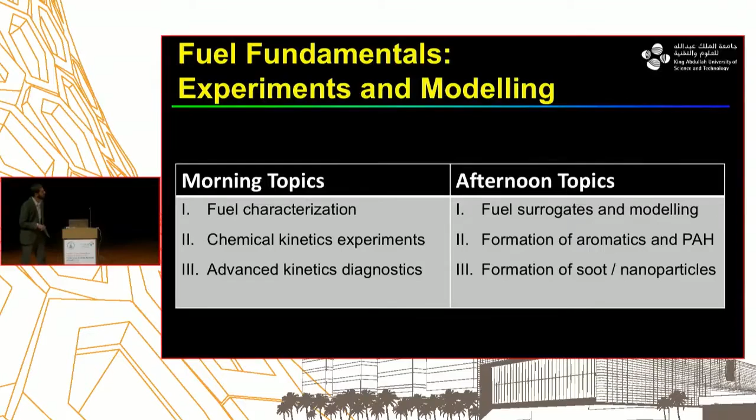So fuel is the most fundamental aspect of all the stories that we've been hearing. We have two sessions today. In the morning, I will be talking about fuel characterization, chemical kinetics experiments, and then, if time allows, a little bit on diagnostics. In the afternoon, Professor Angela Violi will talk about surrogates for fuels and a bit on kinetic modeling, but then she will focus a lot on how aromatics and nanoparticles are formed.

So with that, I'll begin first by acknowledging people. These are my group members. Some of the work that I will present today is the effort of their hard work. This is led by my research scientist, Dr. Binod Giri. Khalil manages everything in the lab. I have two really good postdocs, and really bright PhD students who have helped take our group and our research to where we are today.

In addition, I would like to acknowledge people whose slides either I borrowed, or who kindly contributed them: Manny, Henry, Alicia Renzi, and Bill Green, as well as some PhD students from the center who have been really helpful in providing information. In my group specifically, Fatih has helped quite a bit, along with Abad and Essen, in preparing some of the slides that I have.

Okay, so first, I want to begin with a couple of quick questions. Should it be a one-way instruction? What I mean by that is, although I'm standing up here and you guys are there, I want this to be more like a class. So those of you who have taken classes with me, I really encourage interaction during the classes.

So I don't want this to be a one-way instruction, and if that means I can only cover a quarter of what I've planned, that's totally fine. So please ask lots of questions, okay? And if sending this ball around takes long, just shout out. I don't promise I have answers to all your questions, because I'm presenting work from a lot of the members of the center, but those experts are here.

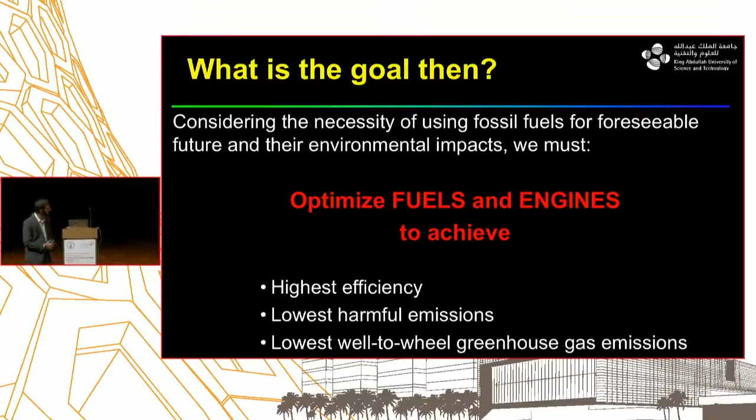In that context, and this is a point many speakers have made before, but I want to re-emphasize, if that's the scenario, then as combustion engineers and scientists we need to optimize fuels and engines to achieve highest efficiency, lowest emissions. Tony talked a lot about emissions, but I want to point out the last point, lowest well-to-wheel greenhouse gas emissions. That's the picture we need to look at, especially when we compare our technologies against other technologies like electric cars.

In fuel and engine optimization, I want to highlight 2 efforts that have been going on. We have a large program with Saudi Aramco called FuelCom, and the idea is to work on new engine concepts along with fuels to get the maximum possible impact we can have. A few years later, a program started in the US as well called Co-Optima, where they're working along the same lines as we've been doing here for some years. These are the kind of efforts needed at a very rapid scale for us to make a big impact as combustion scientists.

Okay, so fuel. As I said, fuel is the most important thing. So the first question is, what is a fuel? Anyone? Definition? Yes.

Multi-component liquid, okay? Does it have to be a liquid? Could be solid, could be gas, right? Could have many forms. But what do we really want to get out of a fuel? So energy, excellent, right? So that's the main point.

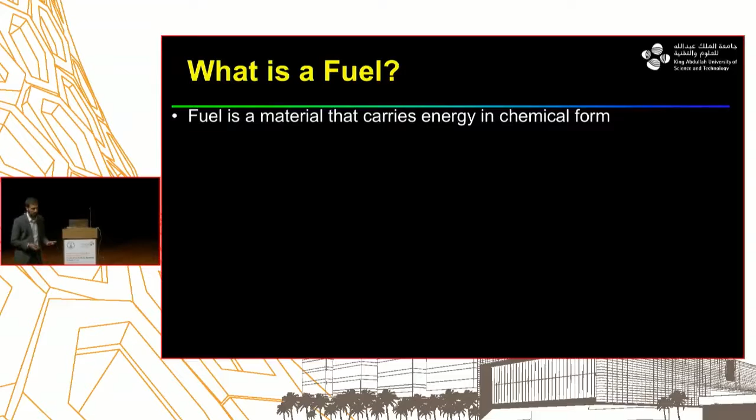So fuel is a material that carries energy in chemical form, okay? Then what do we do with that chemical energy? In most of the times when the fuel reacts, you convert that chemical energy to heat, okay? Most of the times, but not always. For example, in fuel cells or so forth, you can actually directly convert it to electric power as well, okay?

Now, so I said there that in most cases, energy is released via chemical reactions, right? So chemical reactions happen. So that then tells me that I need to really understand those chemical reactions because that's the key there, okay? And each fuel, based on its chemical structure, would undergo different kind of chemical reactions. So those details are very important.

Now, one point which is important to emphasize here is that the energy density of liquid fuels is way, way higher than anything else, okay? And that's really, really important for transportation.

So I make that point by showing you first this energy density plot for batteries and how they have evolved over the years, right? So starting from 1985 to 2020, the Model 3 Tesla car, which is like behind by 2 years in its production. But anyways, so

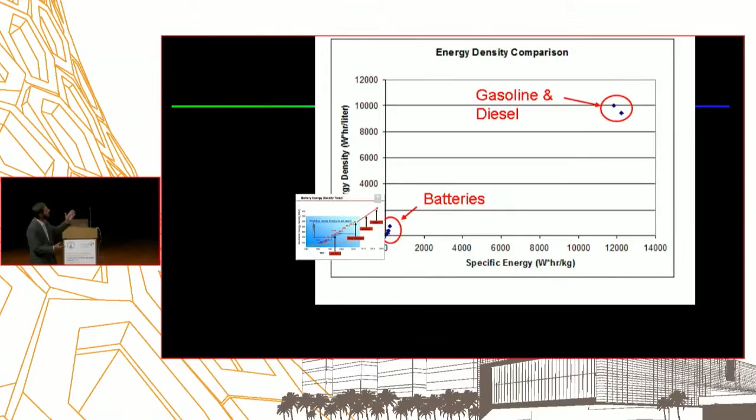their energy density has increased a lot, but when you put it in perspective compared to gasoline and diesel, it's just minuscule even right now, right? So that's the challenge that the batteries or electric cars are facing. And yes, there should be effort in those, but we cannot deny the advantages which are provided to us by gasoline and diesel fuels, okay?

Okay, so then the next question is that what properties do we really want in a fuel? So one, we want to just carry maybe the fuel and not the oxidizer, okay? That would be convenient. So we can take the second one from the atmosphere, which is air, okay? And primarily in air, there are a number of components there, but what really reacts is the oxygen, okay?

Then we want to have high exothermicity so that the fuel releases a lot of heat, okay? And that's what's going to give us eventually work, okay? And then it should be available abundantly in nature. We need millions of tons, as I put on a slide before.

And that's the challenge which is faced by what? The biofuels, right? Biofuels, a lot has been talked about, but most technologies that you have for biofuels, they just cannot match the volumes that you really need, okay? So that's why their impact so far is pretty small, okay?

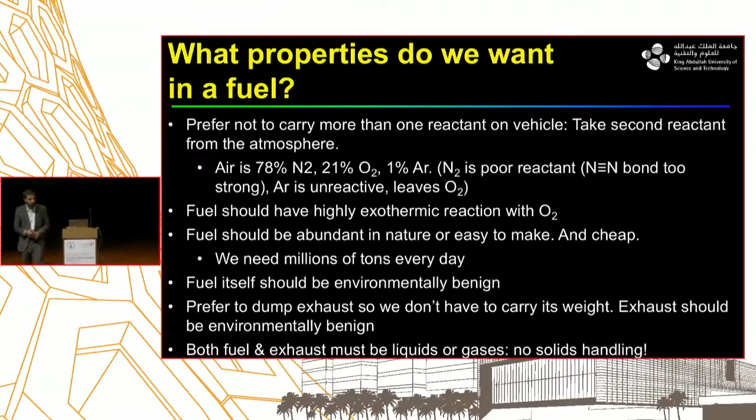Then we want the fuel to be environmentally benign, okay? We want its exhaust to also be not affect our environment, okay? And then it's better if the both fuel and the exhaust are in gas or liquid. It becomes a messy to deal with solids, okay?

So if you look at the entire space that's available to you, right, in the form of all the elements that we have, right, and you put just some basic criteria, it becomes very obvious that carbon and hydrogen have just a unique place, right? You can take any others and look at what happens to them if I use them as fuel. If I oxidize them, in some cases I'll make solid oxide, in some cases I'll make toxic elements, right? Some will not even give me enough enthalpy of oxidation, right?

So if you just set a few simple criteria, you will come to the conclusion that hydrogen and carbon in this entire landscape of the periodic table are what really, and that's why Mother Nature provided us with these, and we've been using that for useful purposes. You may be able to add some oxygen to it, as it is in biofuels, but then oxygen usually reduces the energy density. And in some cases, you can have nitrogen in there.

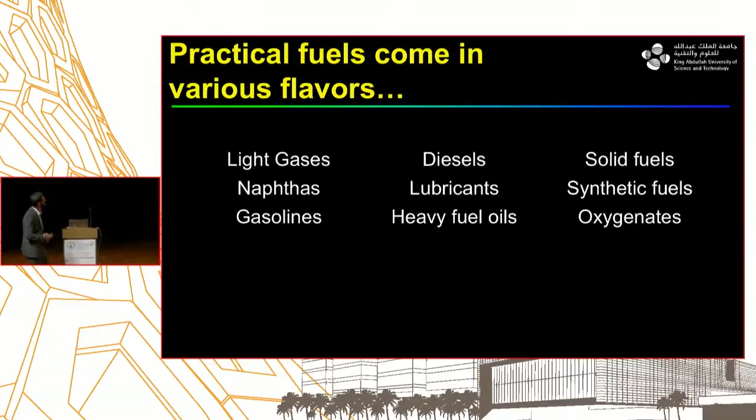So they come in a lot of different flavors, okay? Now if you want to optimize the fuel engine, which I talked about earlier, then you need to do a multi-physics sort of understanding, operation, and optimization. Among those are fluid dynamics, thermodynamics, and reaction kinetics.

So this nice slide put together by Mani talks about that if you want to optimize the efficiency, power, and emission, those could be your end goals, right? Then you need to understand the fuel, how temperature, pressure, and other parameters are affecting it. But the key here is that you have the three main pillars of fluid, thermo, and reaction kinetics.

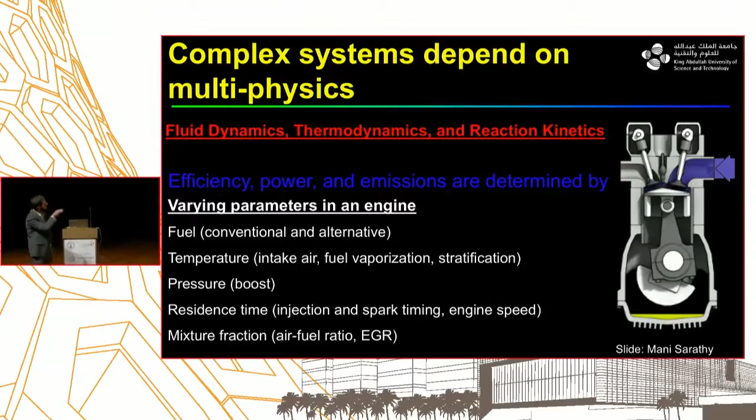And in today's talk, I will just focus on the last aspect of this entire puzzle. So how do we do the fuel optimization process in our center?

We begin with a very complex fuel, and we want to understand its molecular level characterization. Then we want to have a simpler representation. A surrogate is what? It's just a simpler representation of the fuel that we are going to use, okay?

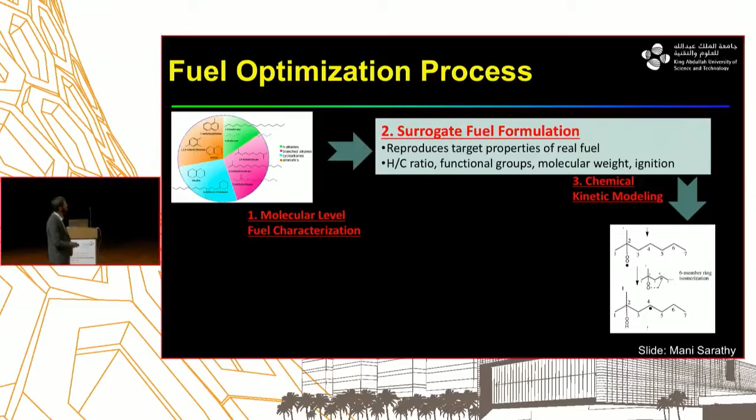Then we build some models for those surrogates. We perform experiments, and there's actually a feedback loop. It doesn't always happen like this. Sometimes you do perform experiments first and then build the models. But there's a feedback that goes on there.

And once you have that, then based on that, you can predict the performance of a device, an energy device, and see also how you can optimize it in the best possible fashion. And then you can go ahead and run engines and optimization. Again, sometimes it doesn't exactly happen in the same sequence, but these are the key steps which you would like to have.

So now in this entire puzzle or picture, what I'm going to talk about in today's class is the fuel characterization, and then the experimental part of it. I'll touch a little bit on the other aspects, but those are going to be the two key aspects. Any questions so far?

Oh, okay, so that was just introduction. Hopefully, and again, you guys asked a lot of questions yesterday to Tony Dean about that, and I think that was really, really good.

Okay, so let's begin with fuel characterization. I've listed here a few topics that I will go through in the next 15-20 minutes or so.

So in a fuel, what you care about are its chemical properties, and you also care about its physical properties. We'll see how you determine the chemical nature of the fuel and how you determine some of the physical properties of the fuel.

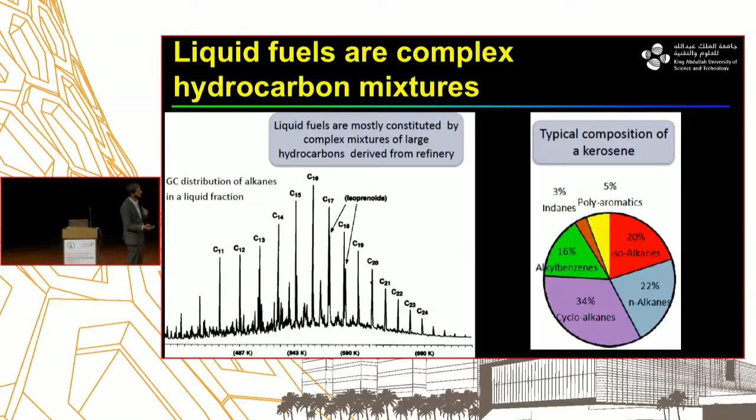This shows the different carbon number peaks that you have and how you discover them as a function of temperature. If you look at something like a kerosene fuel, it has different classes of compounds—alkyl benzenes, isoalkanes. It tends to have quite a bit of cycloalkanes.

But that fuel is going to still have some continuum or a lot of subparts in it—the fuel is complex, that's the point. So if we look, for example, at the boiling point range of different fuels: we have the boiling point on the y-axis here, and the carbon numbers on the right. At the low end, you have LPG, naphthas, then gasoline. Then as you become heavier and heavier, you go to diesel, lube oil, HFO, and so forth.

What you see, the important point here, is that there is a range, because there are many components, so it's not just one point, one carbon number, or one boiling point. Even if you look at gasolines at different times of the year or different geographical locations, they're going to have different composition and different properties.

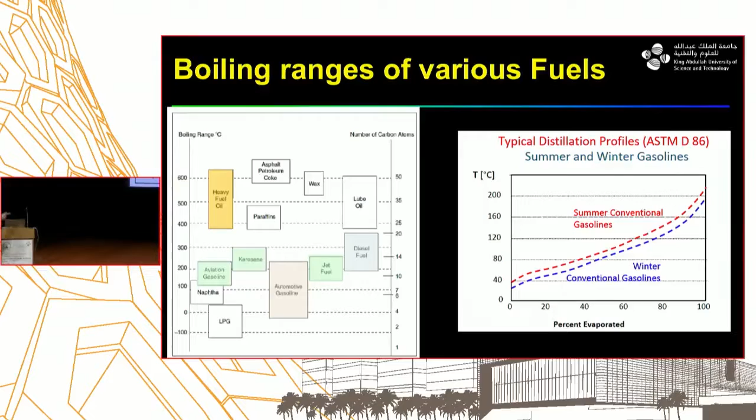The chart on the right shows how the distillation will be different between a summer or a winter gasoline. So the conclusion from this is that real fuels are complex mixtures of hundreds to thousands of components in some cases.

Before we can begin any discussion on the fuel and see what we can do with it, we need to determine what properties we want in this fuel, what will really affect engine performance or any other energy device, and how we can characterize that fuel. That's what I will focus on, and then propose a simpler representation or surrogate for that fuel.

Now, in terms of what properties are important, Bengt Johansson gave an excellent lecture talking about different kinds of engines that we have: the diesel engine, gasoline, HCCI, or advanced engines.

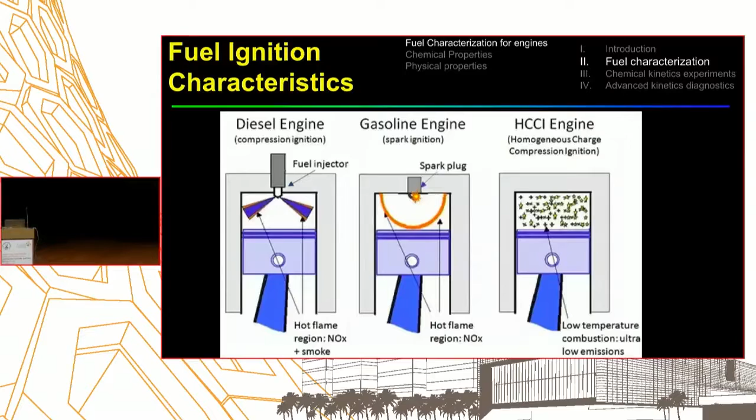What's important to understand in the context of this talk is that the fuel properties which affect energy conversion or combustion in these engines could be different as you go from one engine to another. So for example, if you talk about a diesel engine where you spray fuel into hot gases...

In that case, the chemical parameter that becomes important is the cetane number of the fuel, which is how we describe diesel fuels. Because it's an injection process of a liquid which evaporates, physical properties become very important — how does the evaporation take place? And in terms of ignition, it's mostly hot ignition or high temperature chemistry that affects the chemical processes.

If you talk about a spark ignition process, you are advancing a flame through the mixture via the spark, so the flame moves at a specific speed — a slower ignition — and then you describe the fuel by research octane number or motor octane number.

In order to describe what happens in the end gas, you need to understand knocking, and that's again a very chemical-kinetic-based phenomenon. Now maybe along with higher temperature chemistry, intermediate temperature chemistry becomes important.

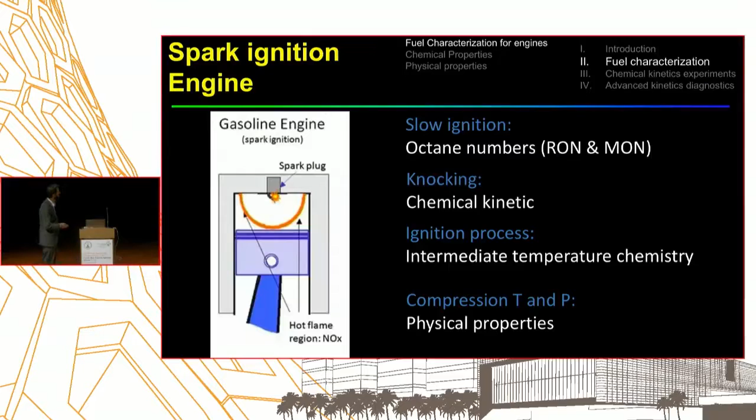Physical properties are still important in finding out the temperature and pressure as you compress this fuel-air mixture. Now, when you go to these advanced engines that Bengt described in detail, like HCCI or any low-temperature version of those, the chemical kinetics becomes even more important, because that could be your only control criteria, unless you have some control loop as Professor Johansson described.

In these cases, low-temperature chemistry also becomes important, along with intermediate and high-temperature chemistry, and physical properties still remain important. So the key point is that based on the device or the operation we have, there will be different properties we need to worry about.

So now how do we determine these properties? One of the very fundamental tools we use is called DHA, or detailed hydrocarbon analysis. This helps you really know the structure or chemical nature of this complex mixture. Primarily it's used for analyzing gasoline fuels.

It could be done for diesel, but it becomes a lot more tricky. What you eventually get from this analysis is how many paraffins, isoparaffins, olefins, and so forth are in the entire fuel. There's a specific ASTM standard used to carry out these analyses.

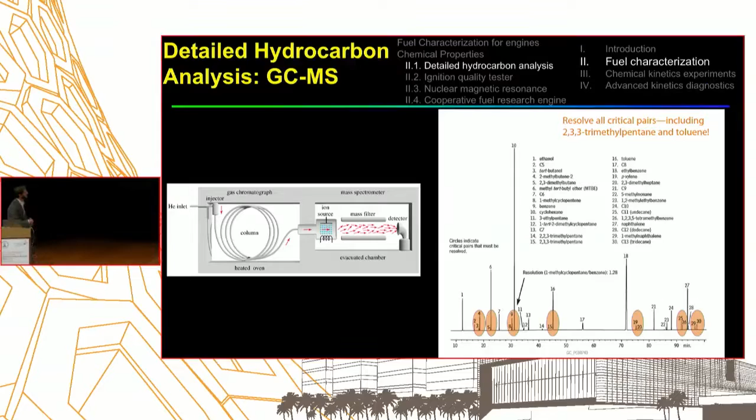For example, you need to really separate out the peaks of, as it says there, toluene and 2,3,3-trimethylpentane, which have very different chemical structures but appear close together, so you need to be able to separate that out.

So how does the typical data look like from DHA? Once you have performed it according to the method, you get a listing of your compounds, different classes, their weight percent, volume percent, and mole percent. That's all very important information we can use to understand the fuel.

You can then group that into different kinds and look at what the carbon numbers are. This analysis was done for a typical gasoline fuel, and it's centered around C7, C8, which have higher mole percentage. You can also group into a specific class and see how many carbon numbers are in each of those classes.

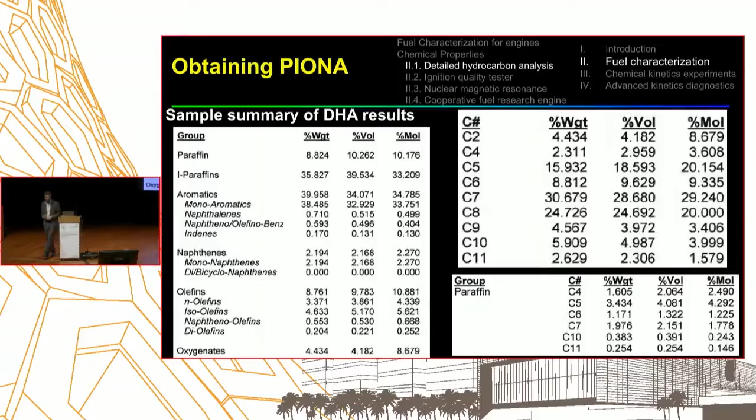So this is now the entire chemical description of the fuel from a structural perspective. Once you have that, you can use it to estimate a lot of properties of the fuel, like molecular weight, octane numbers, H/C ratio, density, physical properties and so forth. As an example, the average molecular weight for this gasoline fuel was around 90, along with some other physical properties.

But these are estimated, based on some blending rules for example. So it sometimes becomes important to go on and actually determine these properties, which I'll talk about next. This DHA will give me an octane number, but it may not be very accurate, so I may have to perform additional experiments to measure the octane number, density, or molecular weight of the fuel, because it uses some rules which may not be very accurate.

So one of the tools now, by the way, just so that you stay on track, on the right at the top you will be seeing the topics that we are covering.

So now we have moved on in chemical properties to the second topic, ignition quality tester, and we are still on the second topic of fuel characterization. The IQT, this is a picture of the IQT we have here in our center, which you would have seen during your lab visit. It's a very nice tool for quickly screening fuels. If you want to quickly know the ignition properties of a fuel, you need a very small amount of fuel and can perform this experiment very quickly. There's an ASTM standard used for that, primarily used to measure the cetane number of the fuel.

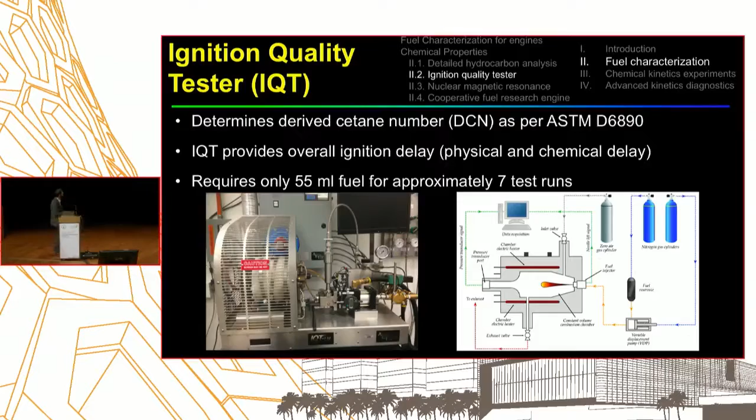On the left is a simulation performed in Professor Hong Im's group on the evaporation. Fuel was injected, it's the spray process, then it's evaporating, some along the walls, and then you see the ignition happening all along. That is shown on the right-hand side on this time versus pressure picture. From there, when you see this really large spike in pressure, that's what your ignition delay time is.

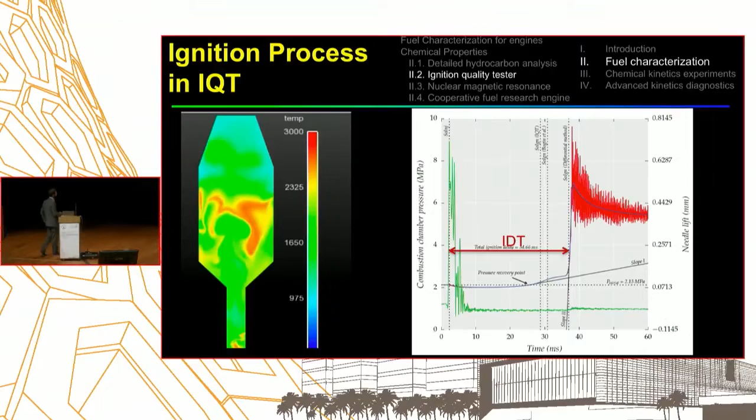But what is important to emphasize for this device, as you see in the simulation, is that there are two processes happening, sometimes in sync and sometimes overlapping. First, the physical processes are important - the fuel evaporates, and then after that it undergoes ignition. So it's a combined effect of both physical and chemical properties of the fuel.

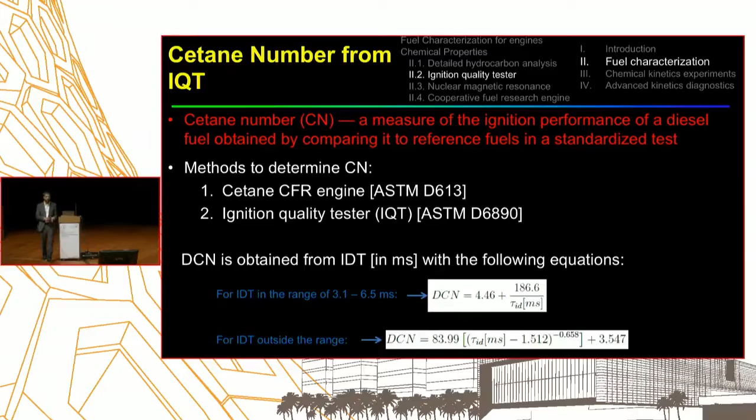What you eventually want is to get the cetane number of the fuel, which you can also get from a cetane CFR engine, for which there's a different ASTM method, but you can get it from the IQT using these relationships. Once you have measured the ignition delay time at a specific temperature and pressure condition, you can convert that to the cetane number of the fuel, and then use that to compare various fuels.

Another technique that has been used widely only recently for characterizing fuels started from some work at Princeton, and now here at KAUST in Mani's group a lot of work has been done using NMR. On the right, at the top, is the picture of the NMR facility at KAUST. We have the world's best NMR characterization tools there—I think we have like nine NMR facilities.

What NMR basically does is look at the magnetic properties of the atomic nuclei. A specific magnetic field is applied around a sample of the fuel, which you inject in there, and then you have detectors to look at how the fuel responds to the applied magnetic field, and that depends upon the chemical nature of the nuclei.

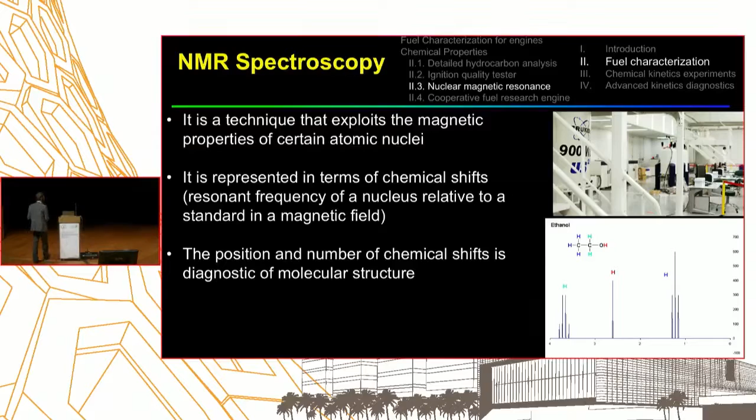What has been used a lot to characterize fuels is the 1H NMR spectra. The 1H method can basically help you know what type of hydrogen atoms are present. In contrast is the 13C method, which I'll talk about next—this basically helps us quantify. Again, you look at the chemical shifts shown there, and from there you can understand what chemical groups you have in your fuel. For each functional group, for example, how many CH3 groups, how many CH2 groups, whether they're paraffinic or coming from olefinic groups—that's how you can delve deeper into the exact structure of the fuel.

So this is a comparison of what you can get from the 1H NMR spectra versus the 13C. Again, it's based on the deuteration, or isotopic substitution method. The 13C method tends to be less sensitive than the 1H method, and it's used to look more at the carbon positions—whereas with 1H we're looking at hydrogen positions in different places in the molecule, with 13C we're looking at carbon positions, which again, based on the neighbor or structure of the carbon around it, the chemical shift will vary as you go along.

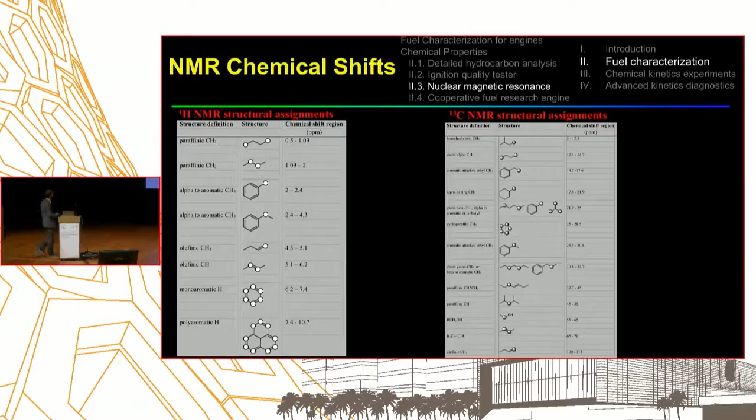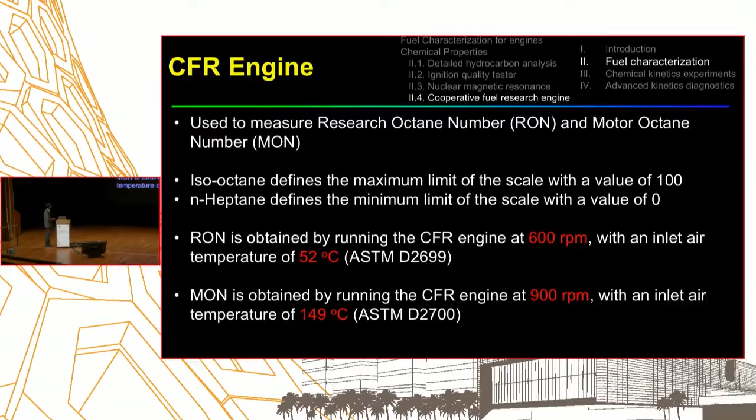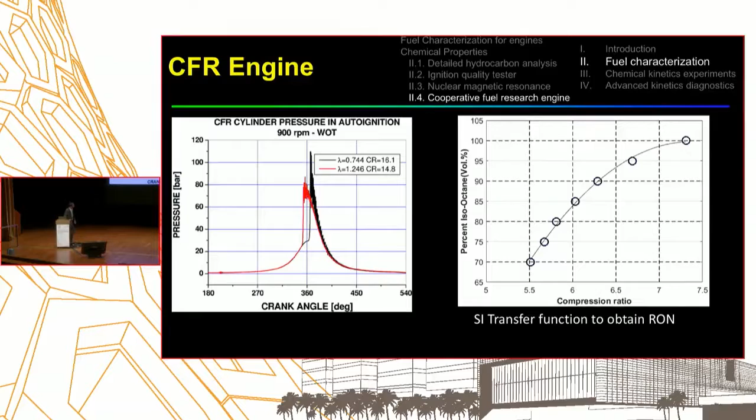Eventually what you do is compare your unknown fuel to a mixture of N-heptane and isooctane, shown on the right there. You see at what compression ratio your unknown fuel ignited, and then you compare it with a PRF mixture of N-heptane and isooctane to assign it a RON or a MON number.

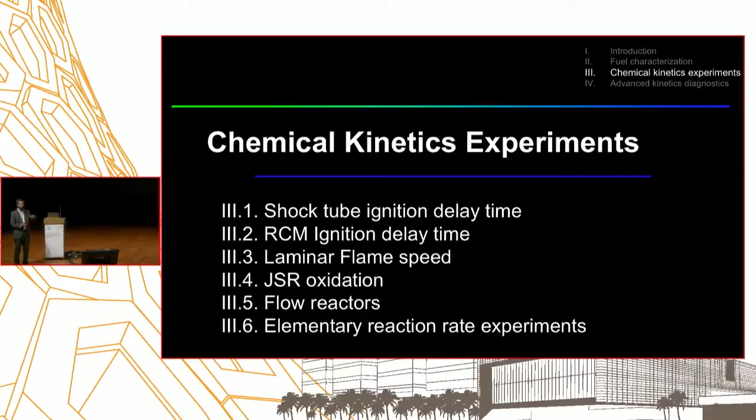Yes. I can hear you, yeah. Nice throw.

You've mentioned that you can measure the RON using the CFR and using the IQT. So what's the difference between the result from CFR and IQT? Are both accurate? So the standard is to use the CFR engine, obviously. And the process that happens in a CFR engine is very different from what happens in an IQT. The IQT just gives you an ignition delay time, and that you then convert to a DCN, a cetane number.

What has been shown in recent work is that this can be correlated with RON. Sometimes we see good agreement between the RON measured in a CFR engine and the RON derived from this entire IQT process. But sometimes you also see some deviations. So if you're asking what to trust as a standard, that's the CFR, because that's what should normally be used for measuring RON.

But the reason you may prefer using an IQT is that it's just faster. You can do it much more quickly looking at different fuels than would be possible in a CFR engine. Yeah, but there are some factors in the IQT that you don't account for, like in the CFR. So again, it's just a very different way of measuring the reactivity of the fuel, but what has been shown is that there is a correlation that exists.

This is from Stanford where I was - I like it because I think it's done really nicely. It's going to show you what happens when you light a match. A person comes in and lights a match on a match box, and you're looking at Schlieren photography there at high frame rates. So you see those nice structures of the exhaust coming from the tip of the match.

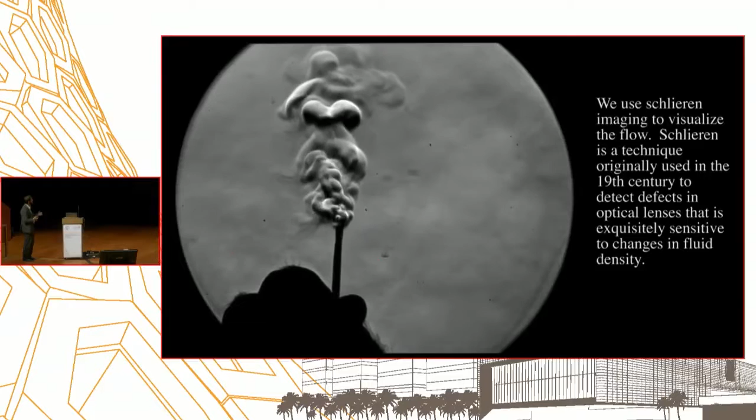Then after a while, it's playing in slow motion. I'll actually let you watch and not say too much - the text on the right is also good.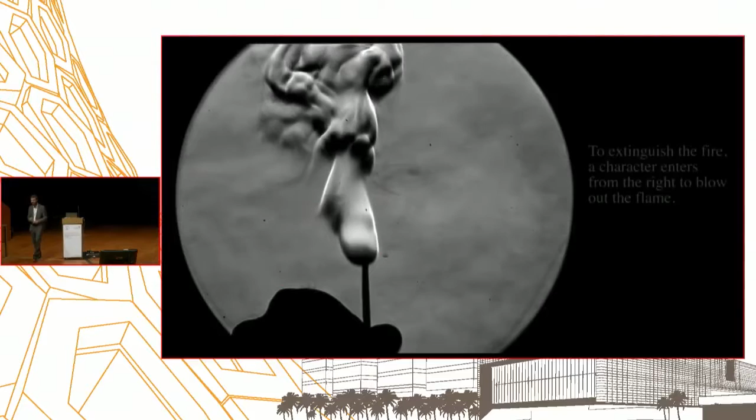Okay, so far it was not actually lit, in the sense that now the combustion products are going to come out. The music's not as good—actually I don't know if there is music, but it didn't work out.

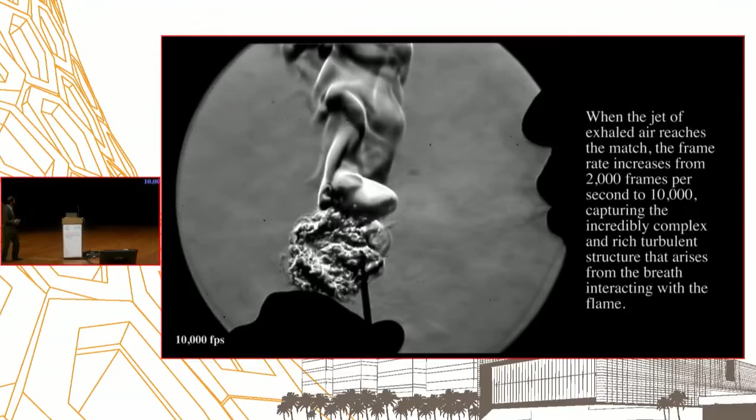So now a person comes in and tries to extinguish the match. Usually it's very easy to extinguish a match, you just blow and it happens. But in this case he's probably not blowing it as hard, so it affects that, and now you see this really amazing turbulent structure forming, the turbulent eddies from the air blown in, probably partly caused by the tip that's there.

So the next quiz question could be, as a hint, what was the Reynolds number in that blow that came in? The hint is 10,000 frames per second.

What's also interesting is that because he probably didn't blow hard enough, it actually eventually reignites. They must have done a few experiments to see this.

Okay, why do I show this video? Again, as I said, it's not exactly related, but I show this to tell you that even a simple match, which we think of as really simple—even that is...

Even that is very complicated, right? You see a lot of structures—initially laminar structure, obviously—and then once someone blows in, there's this turbulent structure, there's fuel burning, and so forth. Even a simple match is very complicated.

So it's not a good idea—well, you can do this—to shine your lasers and try to understand the match as it's burning. You can do that and you'll learn something, but what's important is to isolate the subjects, isolate the phenomena. That's the focus of my next part of the presentation: isolating chemical reactions, isolating the fuel processes, and really trying to understand those in the absence of fluid mechanics, turbulence, or heat transfer. So again I put these questions—why, what, and how—so that we should be asking questions all the time.

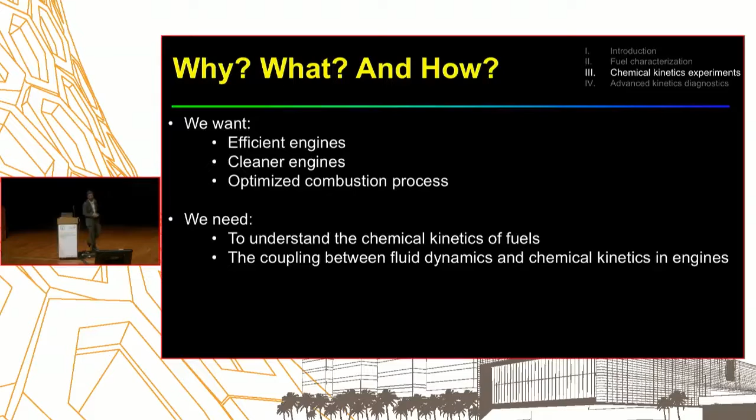We want efficient engines, we've said it many times. But we need to understand the chemical kinetics of fuels, and we want to do it in a way that we can decouple the chemical kinetics from fluid mechanics and other physics that goes on there. So we want to look at the reaction rates, the chemical kinetic models, and how fuels burn, and we want to do this in some controlled environments.

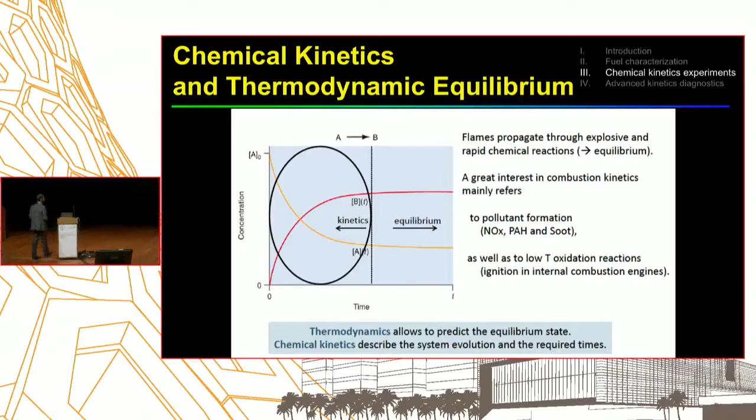Before I go on, I want to point out from this slide that what we want to focus on is the left part of this picture, the kinetics, where transients are happening—some chemical reaction starting before you reach an equilibrium condition, where thermodynamics takes over, governed by the equilibrium constant. But the kinetics on the left side is what we want to focus on, because that affects a lot of the transient processes we're studying—for example, pollutant formation, the knocking process, and so forth that we see in engines.

These reactions proceed according to how Arrhenius told us they exponentially depend upon temperature, and usually these come from some sort of fitting, sometimes from theoretical analysis as well. That's how you describe hydrogen-oxygen oxidation. Generically—something talked about a little on the first and second day—you can look at the oxidation of any fuel as comprised of some initiation, propagation, and termination reactions. The propagation reactions depend on the value of alpha in the second reaction.

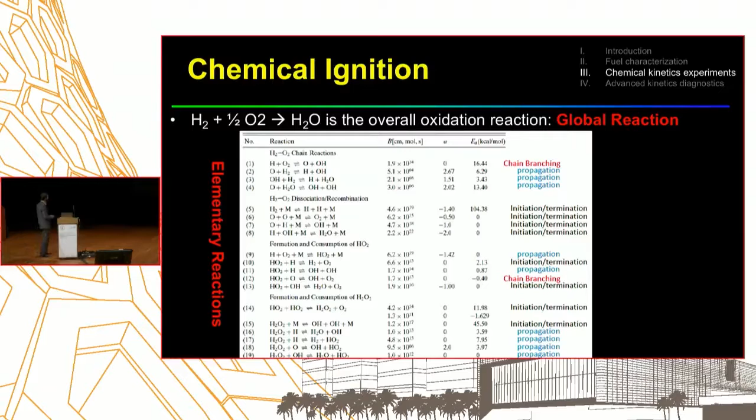And that specific reaction tends to be the key reaction in high temperature oxidation chemistry responsible for the chain branching nature of the system.

So you have these kinds, and then you can put all of that together. You can do what is called a steady state approximation, meaning at steady state the concentration of this radical remains almost constant, but what steady state means is that its consumption and production is balanced. You combine all of that to get a concentration of that radical, and then ask the question: what would make this radical increase exponentially, because the radical is what's going to explode your system.

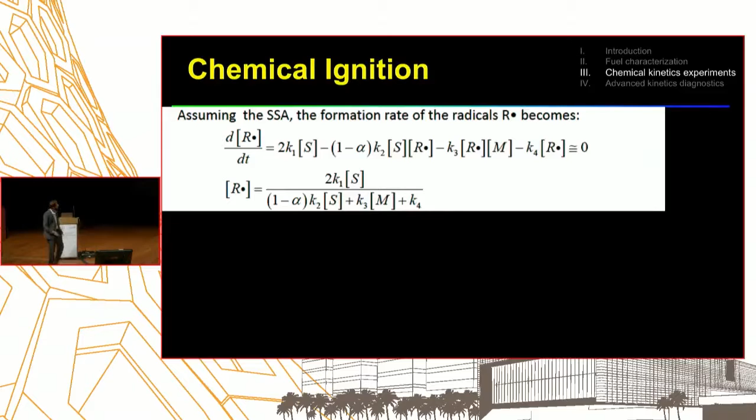I mentioned that just as a starting point, because this will help us understand when I go into a bit more detail of the chemical kinetic processes.

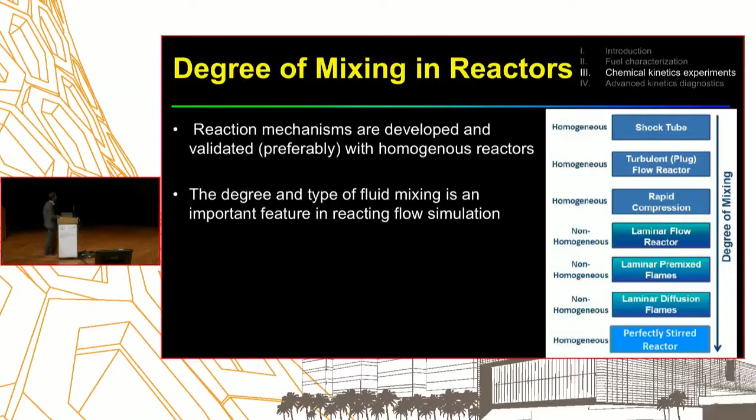So I begin with the shock tube. It's my favorite device, and I say it's an ideal reactor for kinetics. We used to say it's ideal for some time, but now I put 'ideal' in inverted commas, and I'll come back to that when it may or may not be ideal. But anyways, basically it provides us very nice 0D homogeneous conditions to study high temperature, high pressure oxidation or pyrolysis.

We have the driver section and the driven section. They are usually separated by a diaphragm of different materials, as you were seeing in that video. The low pressure section is where you put your fuel-air mixture, which you want to study in this device. So then you pressurize your driver section with an inert gas, such as helium. The diaphragm bursts at some point in time. The shock wave travels to the right, hits the end wall, and then reflects back.

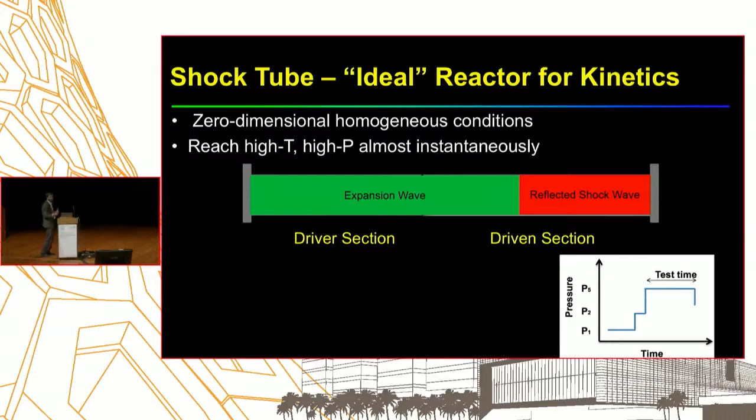In that test time is when you observe reactions or ignition of the fuel. Here we schematically show what kind of waves are generated in this shock tube. You have a shock wave traveling to the right, and some expansion waves traveling to the left. Then the shock wave hits the end wall, reflects back, and there is usually some interaction after some time, either with the contact surface, which is the separation between driver and driven gas, or an interaction with the refraction wave or expansion wave coming from the other side. And that basically ends your experiment.

Ends the experiment means what? What I've shown there is that the pressure drops suddenly, and it can sometimes increase as well, but the uniform conditions stop to exist after that. So that delta T on the right-hand side is your test time or available time, which is available to you to do experiments.

How much is that time usually? That time is usually on the order of milliseconds. Traditionally it used to be a couple of milliseconds. Now we can extend it to longer times, but it's still on the order of milliseconds.

So one important thing you need to do before you can study the fuel ignition is measure the speed of this shock wave. The shock wave is now traveling from bottom to up in that figure. You put a bunch of pressure transducers, which tell you when the shock wave arrived there, and by knowing their distance, you can measure the speed of the shock wave. It can be anywhere from 400 to 1200 meters per second in typical experiments.

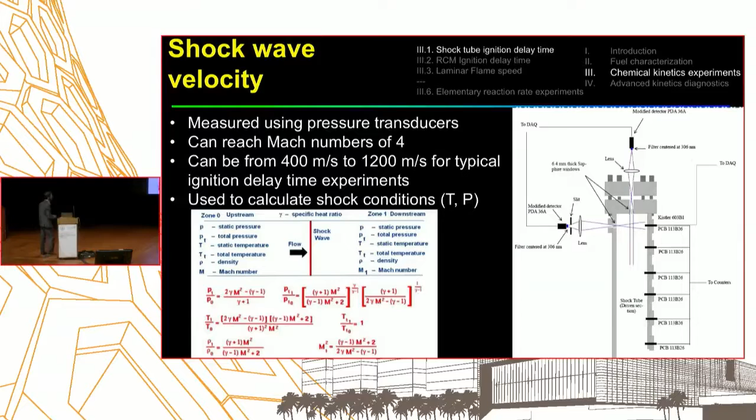So then, what is ignition delay time? Ignition delay time is one of the key quantities that we measure in the shock tube, similar to the IQT that I described earlier. But what is the difference here? Now the ignition is only affected by chemical reactions. There's no physical process going on because I put the fuel as a gaseous mixture, fuel oxidizer.

So one thing to know, and it was probably clear before as well, but I want to make the point again, is that this release of energy is not instantaneous. It looks instantaneous, but it kind of goes on exponentially after some induction time, and that induction time is what you are trying to get, and it depends upon temperature, pressure, and composition. So again, in the shock tubes, this is a homogeneous experiment in contrast to an engine or an IQT, and this really depends upon the chemistry or kinetics of the fuel.

So my student here, Fatih, he really likes this description of the ignition delay time, so he asked me to share this with you as well. There's a kind of legend about the inventor of the chessboard, right. When he invented it, the king asked him, 'Tell me what you want and I'll bestow upon you.' And the guy was smart. He said, 'Give me grains, put the grains on the chessboard, but keep doubling it. Put 1 in the first square, 2, 4, 8, and so forth.' And the king was like, 'Huh, that's all you need? You should have asked for something big.' What the emperor or king didn't realize is that if you keep doubling it, it's going to explode at some point in time.

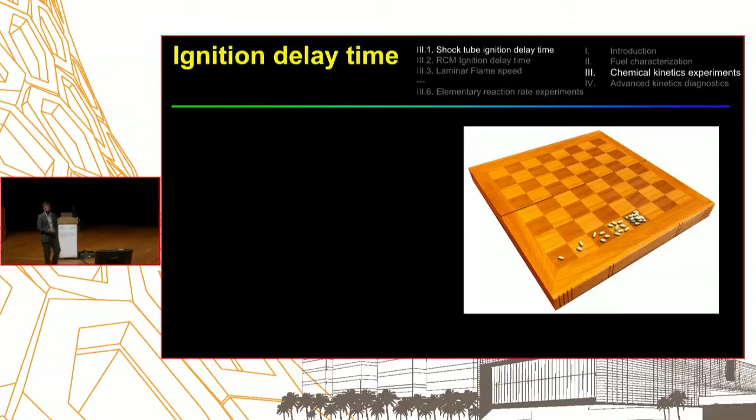So what came out was that if you would have gone like that, it would have required 18 times 10 to the power 18 grains to satisfy the wish of that guy. And that's actually even 1,500 times more than the current world production. And that was long ago.

So what do you think the king did, again, in the legend? What's that? Exactly, right? So he's like, go to hell, you tried to oversmart me, right? So he executed him.

So now, on a more practical front, this is how we measure ignition delay time in the shock tube. What I plot here is pressure as a function of time. Because my cursor is not working, I'm moving myself.

This first jump in pressure is the incident shock wave. Then the second jump in pressure is the reflected shock wave. In this case, we are reaching a pressure of 40 bar, 40 atmosphere, after the reflected shock wave.

Then the pressure almost remains constant, starts increasing towards the end, and then it explodes, at around a little before 300 microseconds, 290 microseconds, and we call that the auto-ignition delay time, or ignition delay time of the specific fuel, in this case 2-methylhexane, at the specific temperature and pressure that you see there.

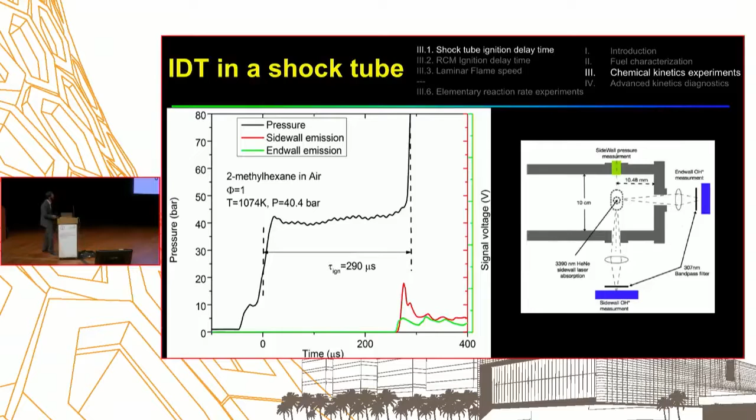But if you want to focus on low temperature chemistry, we want to go to even lower temperatures where you would expect the ignition delay times to be even longer. So how do we measure longer ignition delay times? It tends to be difficult, as I said, with the shock tube.

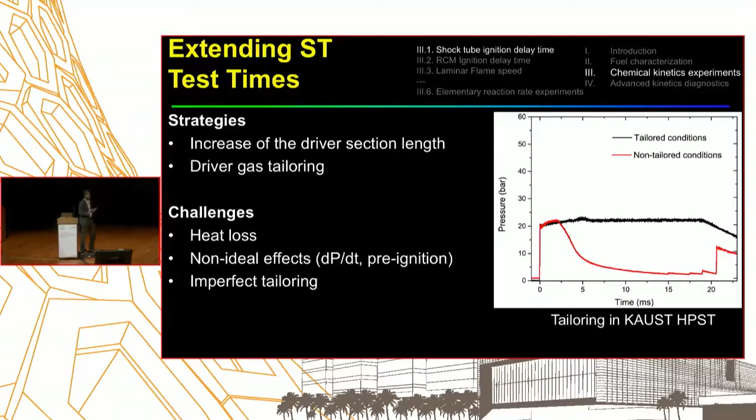But the point is that you can do this, but then some other challenges come into picture. Heat loss, some non-ideal effects start coming into the picture, and sometimes the tailoring is not perfect. What tailoring is, is that you mix helium driver gas with nitrogen or a heavier gas.

So that's a non-ideality, but we can take care of that in modeling. Experimentally, it's very difficult - there are some strategies, but it's difficult. In modeling, we can account for this change by having a volume history of this change in pressure. But you need to really quantify how much that is - is it 2% or 3% or so forth?

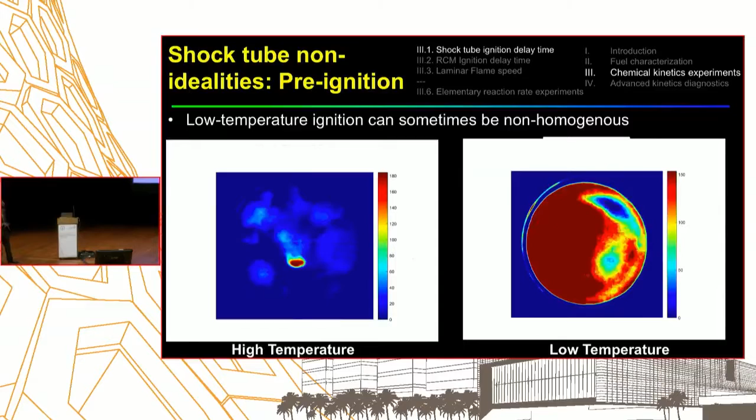What's the frame rate? The frame rate in that case was 10,000 frames per second, so 100 microseconds per frame. So it's actually not fast enough. Later on we've done some work - in this case we were using OH star, so it was limited by that. We've done some visual imaging where we can get to 60,000 or higher frame rates. That's why it's kind of difficult to see the left one - it's just so fast.

Okay, so don't worry, break is coming. We'll take the break at almost 10 o'clock, okay?

So the other device - that was about the shock tube, and I'll come back to the shock tube a little bit later as well - but the other device we can use to measure ignition delay times is called a rapid compression machine. This is a picture of the one we have here. They come in a couple of different flavors. The one we have here is a twin piston machine, so you have two pistons which come from the two ends, pneumatically compressing.

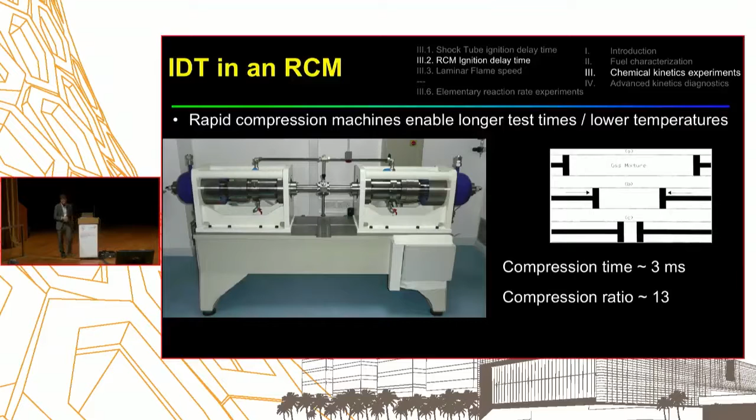And then there's a hydraulic locking mechanism which locks the pistons at their end position, as you see in part C of that picture. So as compared to an engine where you compress and then the piston comes back, here it does not - you lock it into place at the end. Now you have a constant volume operation, and so you can study fuel auto-ignition. The compression time, at least for the last 50% of compression, tends to be about a few milliseconds, especially in this device. Compression ratios can be varied, but here we mostly used a compression ratio of 13. This is just a zoom in of the combustion chamber.

If you look at it more closely, we have those two pistons coming in, and then they're stopped there. This is a zoom-in of the combustion chamber, so the middle is where the combustion happens. Then you have a pressure transducer on the left, and on the right-hand side you have the valve for gas inlet and outlet.

So how do we measure ignition delay time in a rapid compression machine? What you have here in red or black is the compression. Before time zero, the compression happens, and the pressure increases to 10 bar in this case. Then at around 120 milliseconds or so, you see the exponential rise in pressure. That's your tau, the ignition delay time.

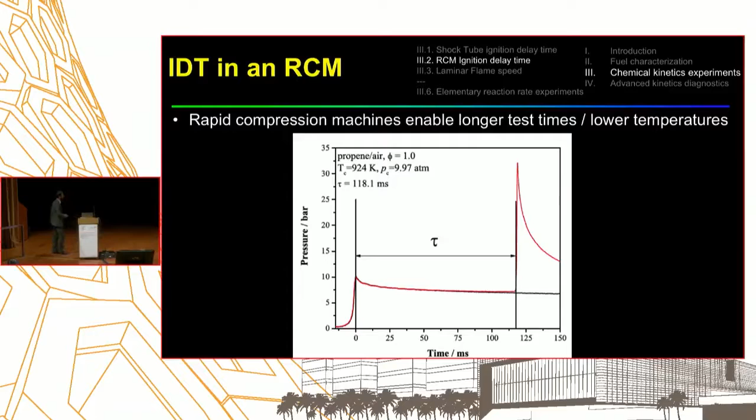But what we also see is a gradual decrease in pressure, and that's something I'll talk about in a second—it's a non-ideality of the rapid compression machine. So what is really nice is that you can combine the shock tube and rapid compression machine data.

So we combine the shock tube and RCM to study a wide range of conditions. Now what about some non-idealities in the RCM? One of them is that, compared to a shock tube, you don't have a shock wave—you have an actual piston coming in.

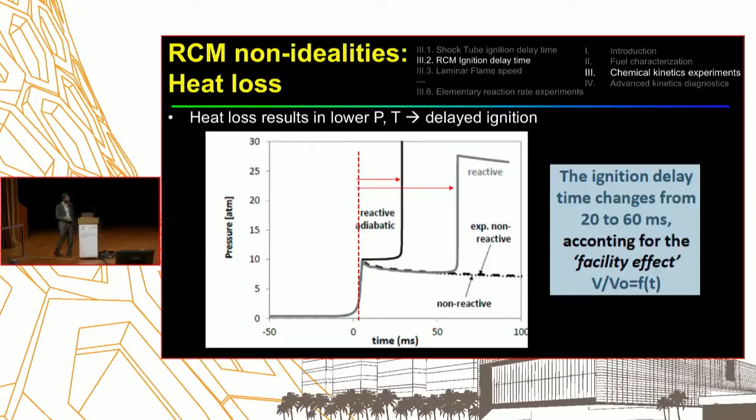So again, this is the nature of the device—you can't really overcome that. What you do is account for it by measuring the non-reactive traces, and with that you can include this in your modeling. That's what we call the adiabatic core hypothesis: you assume that your core is adiabatic, and that you've done a good enough job of absorbing the vortex and the boundary layer, and then you can apply the isentropic expression.

Okay, so you can use the isentropic expressions to calculate the temperature at the end of the compression, as shown here. Then by measuring the pressure, you can calculate the volume history, and with the volume history, you can know how much is the heat loss and include it in your model. So that's how you model an experiment in an RCM. Again, it's not as ideal an experiment as a shock tube, but it still provides us very valuable data.

Okay, I think it's probably a good time to take a break, because I'm going to talk in a bit more detail about what you get from this. So any questions before we go for a break?

How will you characterize the validity of using the chemical equilibrium assumption for hydrocarbon gaseous fuels like natural gas and propane? You showed a graph at the beginning of something. Okay, so that's basically a time scale question, right? If any chemical system, if you wait long enough, the transients will go away, the kinetics will go away, and eventually everything will be dictated by equilibrium, by the thermochemistry of the system. So it depends on whether you want to look at a system in steady state.

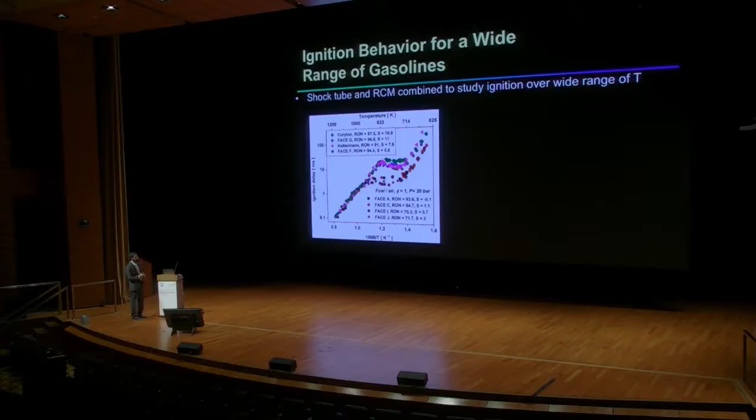These 8 different gasoline fuels have very different octane numbers. Some have 70, 80, 90, so they behave very differently in the engine. Also shown is S, the sensitivity of these fuels, which is the difference of RON and MON. These fuels have very different sensitivities too - some have about 0 sensitivity, and some as high as 11. So very different fuels, both in RON and MON, but also in chemical nature and composition, which we've checked by doing DHA. We know they're very, very different.

But what's really interesting is that at high temperatures, like higher than 1000 Kelvin or 950, they all have very similar, almost identical ignition delay times. Once you go to lower temperatures, in the region we call the NTC, negative temperature coefficient region, you start seeing separation between these different gasolines. At very low temperatures, again you see some separation. So the composition dependence or RON-MON dependence is negligible at high temperatures, predominant in the NTC region, and relatively weak at low temperatures.

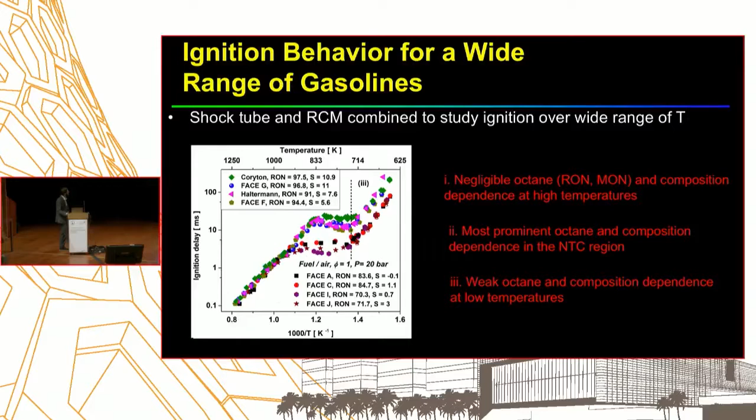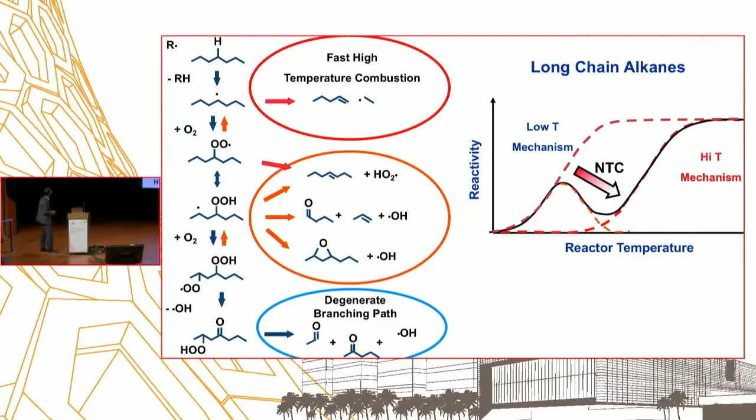So what I wanted to highlight here is that high temperature ignition is, for all practical purposes, very similar across fuels. We see differences in fuels only as we go to lower temperatures. The chemistry at high temperature and low temperature is very different. At high temperature you have pyrolysis followed by oxidation. At low temperatures you could also say it's oxidation followed by pyrolysis, but it's very different - you have O2 addition, RO2, and it's not a two-step process but a multiple-step process. It depends a lot more on the chemical nature of the fuel.

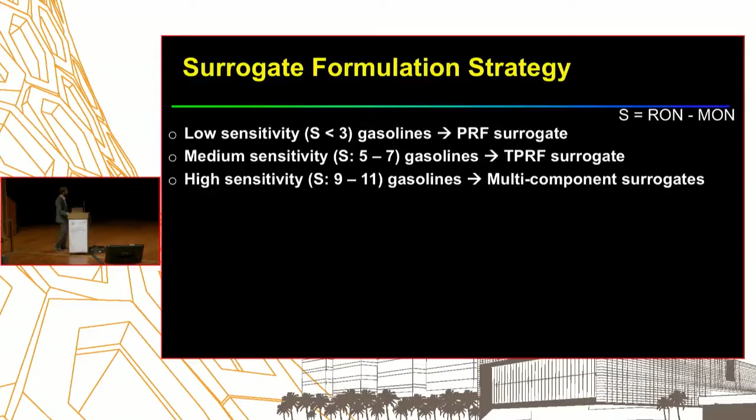I'll quickly point out, without going into details, a lot of work we've done on surrogate formulation - Angela will talk more about surrogates later in the afternoon. We figured out what kind of simpler representation to use for a variety of gasolines, categorized by the sensitivity of the fuel, where S is RON minus MON. For very low sensitivity fuels, irrespective of their RON and MON numbers, you can use a PRF, a two-component surrogate, to describe ignition. For medium sensitivity, you need to add toluene to compensate. For very high sensitivity fuels, you need multi-component surrogates. We have a nice tool in our center where you can input target properties and it helps you come up with a multi-component surrogate representing the real fuel. You can try this tool and others at the CloudFlame portal.

Okay, so that was all about ignition delays in the shock tube and RCM. Any questions on that?

I want to emphasize that the high temperature ignition of all practical fuels being very similar is an important take-home message from that part.

Okay, another kind of experiment that you can use to characterize the chemical nature of the fuel is laminar flame speeds. Professor Maruta talked about this in detail in his lecture on the first day, so I will not go into detail, but the point here is that this gives us an additional measurement that you can use to validate your mechanisms.

It depends not only on the high temperature chemistry, but also on the transport properties of the fuel. So you have different methods for measuring flame speeds: burner method, flat flame, and the method we use in our center, the outwardly propagating flame.

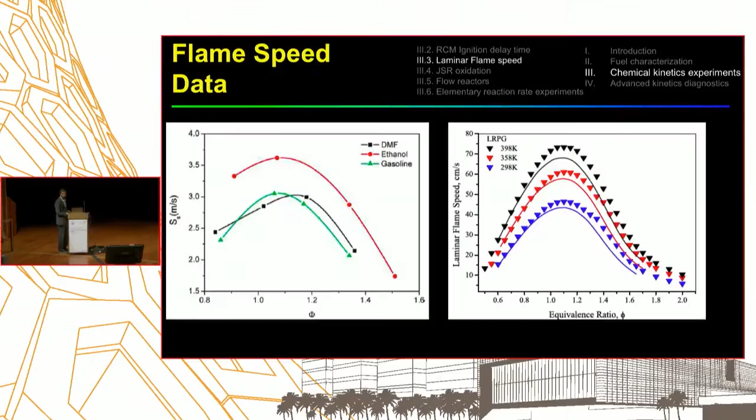Any other questions on flame speed? No? Okay, other than that one.

The other device that we use for testing our models, and we have a very nice setup for here, is a JSR. What you do is have your reactants coming in from the top, and you create some sort of jet structure in the middle to create enough mixing, so that you can have a well-mixed fuel-air mixture. I was just talking to a student in the break about how a lot of work has gone into designing these jet reactors, using measurements to make sure you get enough mixing before looking at the chemistry under those mixed conditions.

Usually you use a GCMS kind of coupling to it, although it can be coupled to more advanced diagnostic methods as well to look at speciation. So primarily you look at the different species coming out of the exit of the jet reactor. There are many different designs that people have looked into.

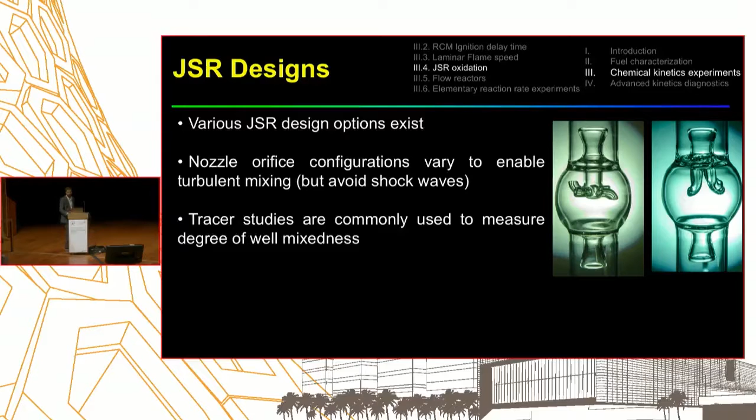The configuration of the nozzles, the number of nozzles, the angle of the nozzles, and so forth. You can do validation studies, some tracer-based studies, to look at which design is better than the other. Some work was done here and at other places to verify this. The most famous design is the Philippe Dagaut design that is used in many different places.

Okay, now flow reactors, moving on to the other devices. The flow reactors, they come in different flavors. So this is an example of the Princeton turbulent variable pressure flow reactor.

For a turbulent reactor, what you make sure is that you have enough mixing in the early part of the reactor through turbulent processes, so that then you can go ahead and model this as a plug flow reactor. The total residence time in that case can be broken down into your initial mixing time, or the perfectly stirred reactor time, plus the PFR time. If the initial mixing time is small enough, then it becomes relatively easy to model what happens in this turbulent flow reactor.

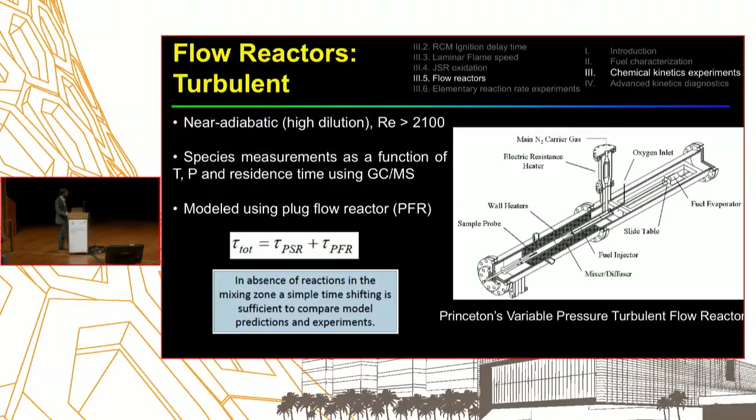Now, I'm not showing you some examples of data from here, but basically the data that you get out of these flow reactors is also speciation. So you couple it to GCMS kind of devices, and then you can look at, as a function of temperature and pressure, because this can go to really high pressures, what happens to chemistry at high pressures.

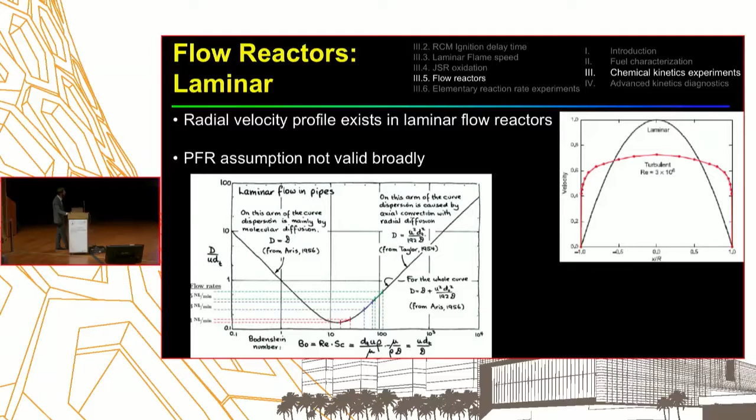What he shows is that based on this pipe flow kind of diagram, just in the valley of that picture is where you can model this as a PFR, as a perfect PFR in your modeling. So once you make sure that you are in that condition, then you can go ahead and perform very nice experiments in laminar flow reactors as well.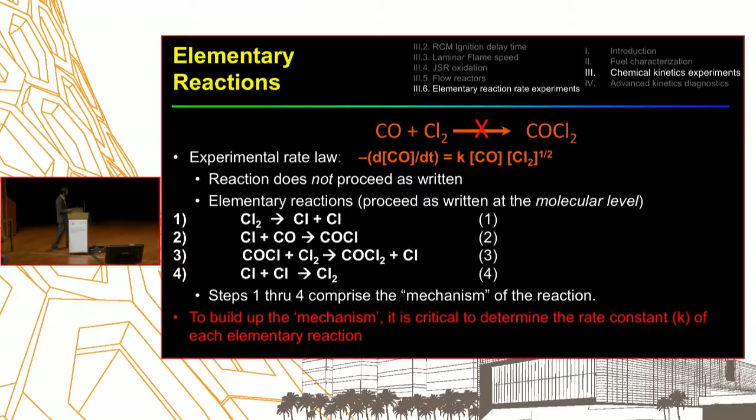It actually proceeds through a bunch of elementary reactions. In this case, these four reactions describe the chemical mechanism happening: Cl2 dissociates, giving two chlorine atoms; that reacts and combines with CO to give COCl; that reacts with Cl2 to give COCl2 and then a chlorine atom, which can combine to make Cl2—that last one would be a termination reaction, two Cl radicals coming together and making Cl2. So to describe this formation of phosgene, we need to know these four reactions really well, including the rate constant of each individual reaction, so we can describe the mechanism.

These individual elementary reactions come in different flavors: you can have a unimolecular reaction, just some A going to products; bimolecular reactions, A plus B coming together giving one or many products; and sometimes termolecular reactions. Why didn't I keep going—why not 4-molecular, 5-molecular reactions? The statistical probability of that happening is very low. Even termolecular reactions are not as common a reaction class as bimolecular reactions.

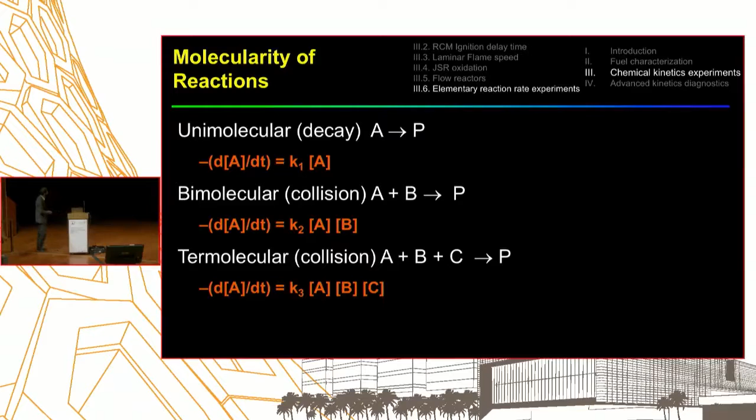So what I've written there is the law of mass action for these, and again what we want to know is the rate constants K1, K2, and K3 for these kinds of reactions. One device we use in our lab to measure elementary reaction rates is again the shock tube. The shock tube can be used to measure the auto-ignition delay time I described earlier, but it can also be used to measure these elementary reaction rates.

In this case, you make use of a laser-based diagnostic. What we are doing here is we want to detect OH radicals. So we start with a pump laser at 532 nanometers, pass it through a ring dye laser, which gives us a visible laser at 613 nanometers, then we frequency double it to get UV light at 306 nanometers.

Then we pass it through the shock tube. We measure the intensity before the shock tube, I naught, and then after the shock tube. We combine those two intensity measurements using the Beer-Lambert law to calculate the mole fraction of OH radicals. That 306.7 nanometers is in resonance with an OH absorption feature.

So in this case, the objective was to measure the reaction of fuel plus OH. Fuel could be anything—methane, toluene, N-heptane, or a more complex mixture—but we would rather use a single component fuel. Then we want to know the rate constant of that fuel plus OH reaction.

But how do you get OH in the shock tube? We don't want any other things in there, so we use a thermal precursor called tert-butyl hydroperoxide. The bond between O and OH is very weak, with low bond dissociation energy, so it breaks off quickly as the shock wave heats the mixture. That gives you an OH radical, which can then react with the fuel. You also get some extra stuff, butoxy, which you don't want, but you can take care of that.

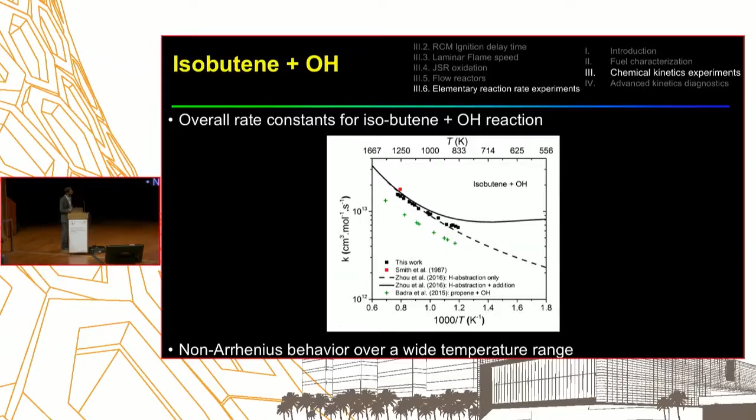But what you see is that black solid line, and some of our data also show that at lower temperatures, you start deviating from the Arrhenius nature—rather than a purely Arrhenius behavior, you start seeing non-Arrhenius behavior. What happens is that at lower temperature, rather than abstracting an H atom from isobutene, OH starts to add to the double bond. That addition process has very different physics and chemistry than the abstraction process, which is primarily what we studied here.

Okay, so how does this reaction actually take place? Now we are going to look at the details of the elementary reaction. We have an OH radical at the top coming in and attacking this isobutene. Just for simplicity, I also show the isobutene structure down there.

So now that OH can abstract an H atom, basically knock off an H atom from one of two sites, either from the CH2 site or from the CH3 site. That CH3 site is called an allylic site, and this one is called a vinylic site. So that's what you see in those two channels: channel 1A, where it was removed from the CH2 group, or channel 1B, where the H was abstracted from the CH3 group.

Now these two are sort of two sub-channels of the overall reaction. Why would I want to know the rate constant of these two sub-channels, K1A and K1B? It's actually very important, because what happens next to that radical at the top or at the bottom is very different. The allylic radical that we have formed is very stable, so it persists for long periods in your combustion system, whereas the vinylic radical is much more reactive. So this distribution between these two radicals is very important to predict the overall oxidation of this entire system. But then how can I get it?

How can I measure K1A and K1B? Because the only measurement that I showed you was just the OH, and OH is used in both channels. So how can we do that?

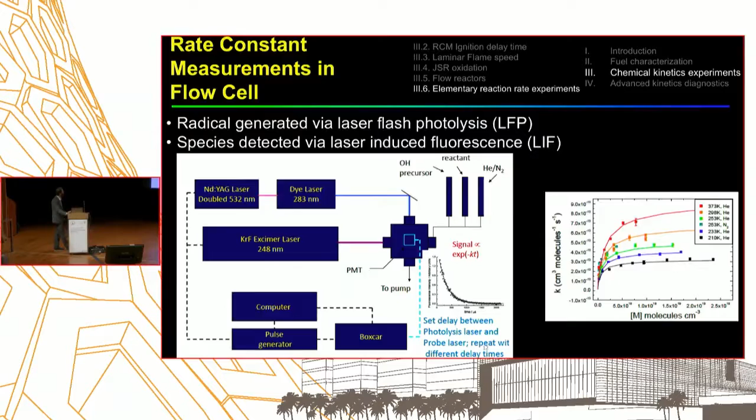Okay, so that kind of ends the third topic of the presentation. Now is a good time to ask questions.

Anyone? Or should I ask questions to you guys? Yes, Professor Marud.

Regarding the sensitivity, Ramon, is it possible to provide the physical or chemical interpretation about S? There's work from Lawrence Livermore National Lab showing that sensitivity can be related to the slope of the NTC region. If I plot ignition delay times as a fundamental description of the fuel, you can see the sensitivity as a slope of that curve. But more than that, sensitivity is related to, for example, alkenes with double bonds, which affect the bond dissociation energy, and that affects the sensitivity of the fuel. So alkenes tend to have higher sensitivity than alkanes, related to how easily you can go through the degenerate low temperature chain branching pathway. But once the alkene gets longer, sensitivity starts dropping because it doesn't behave like ethylene or propylene anymore. So the short answer is that sensitivity can be related to the chemical nature of the molecule.

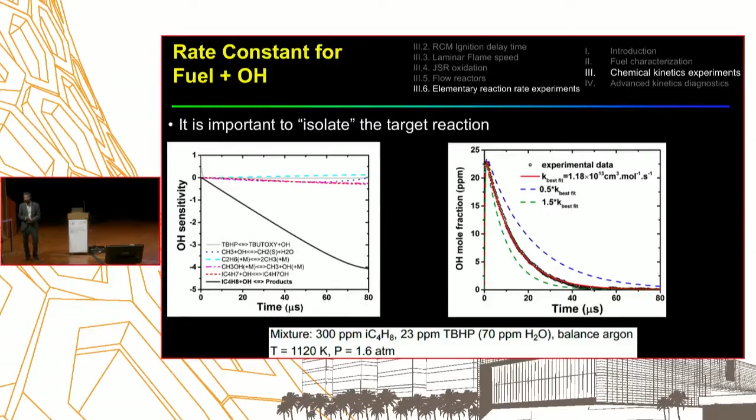Okay, I think we're good. Let's move on. Yep, okay, all right.

We go to the last part of the course, which is how you can make use of more diagnostics to unravel further things about the chemistry of the fuel, or what's happening in these devices. I've listed five techniques: absorption spectroscopy, thermometry, cavity enhanced, mass spectrometry, and microwave. This is by no means exhaustive, just the ones I like or have used. In the interest of time, I'll only talk about the first three, but the fourth and fifth are also very important.

Mass spectrometry I've talked about a little bit before, especially when done at a synchrotron-like facility, where it can provide a wealth of information. Microwave spectroscopy has been used quite a bit in the past, but recently there's nice work from Sandia National Lab showing it can also get additional information about species you may not be able to detect otherwise.

Okay, so we will focus on the first three. So, absorption — it's probably the simplest of the laser diagnostic techniques, but it's very useful and can provide really quantitative information, which is sometimes tricky with other techniques.

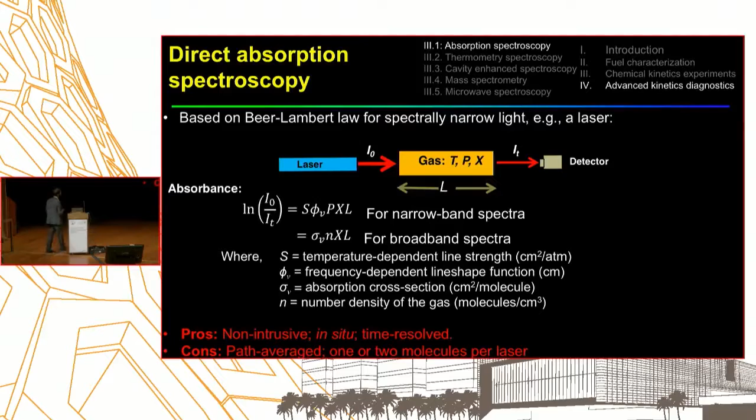So its pros are that it's non-intrusive, and you can reach really high time resolution. The big con of this is that it's path-averaged — it gives you a measurement over the entire path length L, which is okay in homogeneous systems like a shock tube or a rapid compression machine, but not very suitable for flame-like experiments where you have a lot of inhomogeneity along the length of the laser.

So to go a little into the fundamentals: what you're trying to do here, for those not familiar, is start with a ground quantum state and choose an appropriate photon energy or laser wavelength that will make the transition from ground to upper electronic state. Depending on which region of the electromagnetic spectrum you're in, you may only be perturbing the rotational levels — that's the microwave region. You may be perturbing both rotational and vibrational energies of the molecules, which gives you the infrared spectrum. Or if you also make changes to the electronic nature, moving electrons from one shell to another, that gives you the ultraviolet region.

So you can use lasers in different regions to do absorption spectroscopy for measuring mole fraction or other quantities of interest. What we do a lot here at KAUST is most of our work in the infrared region, but I should give an example of measuring OH in the ultraviolet region. The ultraviolet region tends to give much higher sensitivity, especially for radicals, but for molecules it becomes more cluttered, and it's easier to separate them in the mid-infrared.

There are some databases you can use to get the S and phi parameters, the spectral parameters. HITRAN and the PNNL database are very useful to look up the spectra.

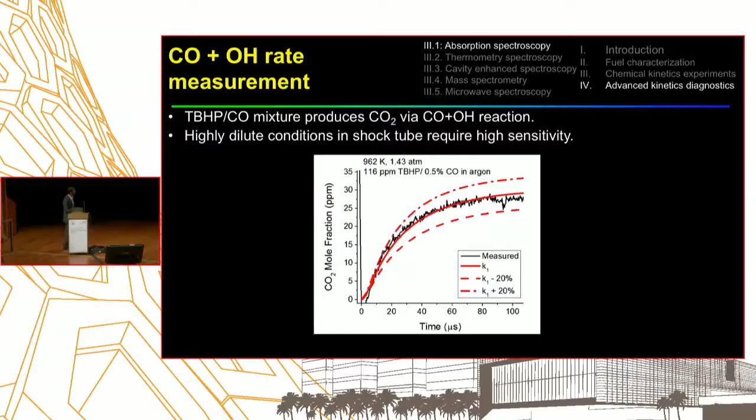Here we are looking at the formation of CO2 in black, and by doing some modeling we can get the rate constant of this reaction. But attention must be paid that the amounts we are measuring here are in parts per million—very small amounts, starting from a few ppm to 25 ppm. So you need a really highly sensitive diagnostic to make these kinds of measurements, and that's what the mid-infrared and quantum cascade lasers give us.

The next thing you can do is measure temperature, which is obviously a key parameter in any combustion system. The way you can measure temperature is by a method called two-line thermometry. You choose two transitions, two different wavelengths, and when you take the ratio, all other quantities cancel out, and the ratio can be used to measure temperature.

If I measure R, the ratio of the integrated areas of two transitions, it only depends on S, the line strength parameters, which are known from spectroscopic databases. This simple formulation can be used to get the temperature of the gas, depending upon the transitions that you choose.

It could be the rotational temperature, if you are choosing rotational transitions, but then you assume an equilibrium where all translational and other internal energy modes are in equilibrium. The E parameters there are the lower state energies, which indicate the quantum energy of that state.

This is an example where we chose two CO lines. We wanted to measure temperature in the rapid compression machine, because there were concerns on how uniform the temperature is, and how the temperature changes when a two-stage ignition process happens.

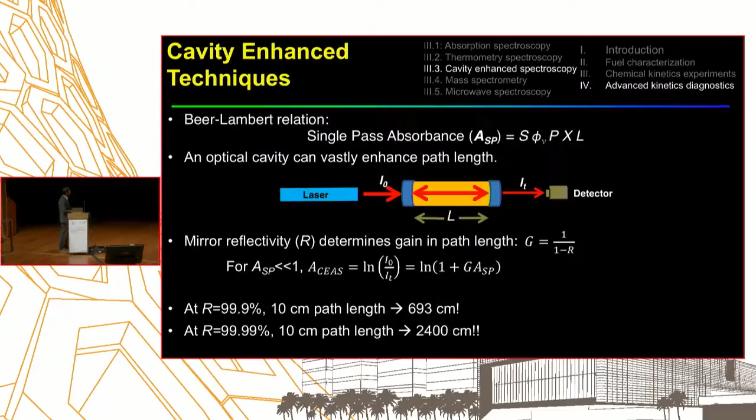The one important parameter here is shown in this equation, G, the gain. The gain depends strongly on the reflectivity. In simple terms it can be written as 1 over 1 minus R, and that's how we calculate how much gain or enhancement you get with this kind of technique.

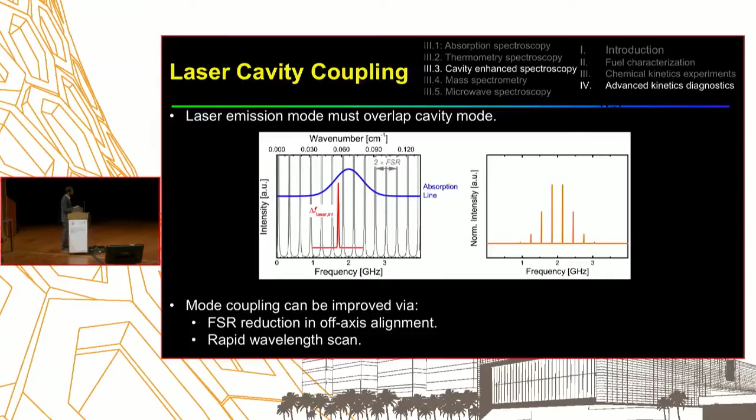To increase this overlap or coupling between the laser and the cavity, you can use different tricks. One trick, which I'll talk about on the next slide, is called off-axis alignment - that decreases the free spectral range, FSR, meaning it brings more modes into the cavity so you can have more coupling. Another trick we use is to scan the laser rapidly, so the red line moves across very quickly, giving more chance of overlap. This overlap, in a simple sense, you can think of as constructive interference - you want that constructive interference to happen to get a good signal.

We had recently applied this off-axis alignment in the rapid compression machine in order to measure carbon monoxide mole fractions at very low temperatures.

And cavity-enhanced, so we have two mirrors. Yeah, the blue are the mirrors. So the left mirror, how does the laser signal pass like from all over, like

from top to bottom? Okay, first of all, because it's a highly reflective mirror, I think in this case we were using maybe 99.5% reflectivity mirror. So the total light that you have, the sum should be equal to transmission plus absorption plus reflection. So most of it, 99.5%, is going to get reflected. So only a small amount, minus the absorption, will get transmitted through the mirror, and then it enters the cavity. That's the first point.

Now, once that light enters the cavity, the off-axis alignment means it's just a little bit off, not going exactly parallel. It enters, then goes and hits the second mirror, traveling at an angle. We've shown straight lines there because that's just a cartoon. Then most of it, 99.5% of that intensity, will be reflected back, because that's the reflectivity of the mirror. Then it hits the first mirror, and only a small amount will leak out, and most of it will go back and forth as well.

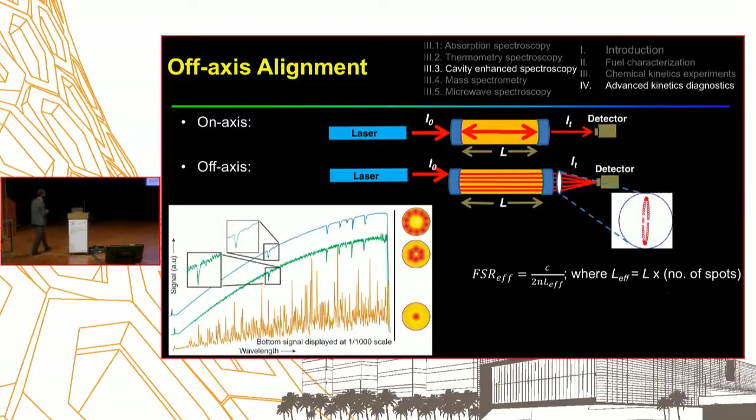Could you put your shock tube back on? Which one? Close by - no, it had the shock tube with a laser going through it.

Now look, I live here and I've done experiments. The rapid compression machine itself hemorrhaged oil one day, just shot oil everywhere. It was a bad day. So my point being, every time you add a diagnostic and add another toy to your apparatus, the probability that you actually get to the end goes as the product of all the probabilities that everything works.

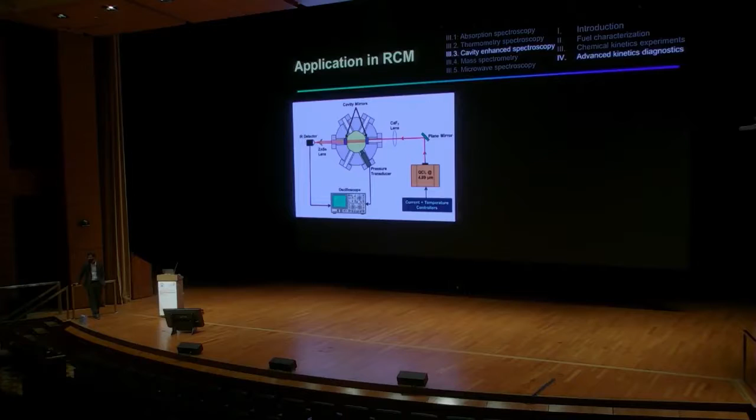But of course, typical data means the only data I got in one month, okay? I can say the same thing about computation. Same thing can be said of the computation, especially today's HPC. Every time we have to deal with these supercomputers, they change their operating system, and suddenly the perfectly finely working code stops working. It doesn't compile, and so on. So the chances of getting 50 million hours of simulation in a single shot is nearly zero.

Well, I might add, it should bother you that we did change the operating system on our computer way back in 1985, and then we ran our turbulent code and we get a different answer. And imagine that you're balancing your checkbook on an Excel spreadsheet, and then you buy a new laptop computer and your bank account changes.

Question over here. Okay, thank you for your presentation anyway.

I have a question about the jet-stirred flow reactor. So if you consider the temperature inside the reactor and another temperature at the output line, in this way, do you have a temperature gradient between the in and out, or do you consider one temperature?

I think you want to maintain a uniform temperature, and you want the change to be, because of any exothermicity in the system, to be very small, right? But her question is, what temperature do we actually report? Is it the inlet, outlet, or the middle temperature from the JSR?